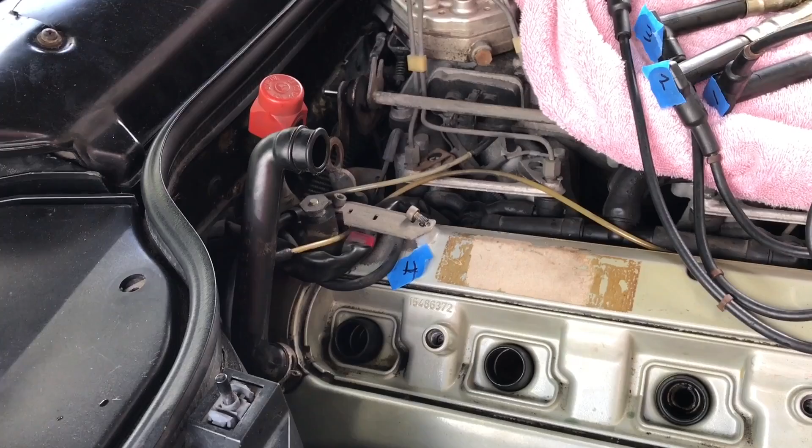Okay, this right here is a 5mm hex wrench, removing the engine wiring harness clip.

So unscrew these and it goes this direction, like this. Okay, so you gotta remember that. The trapezoid part points towards the outside of the car.

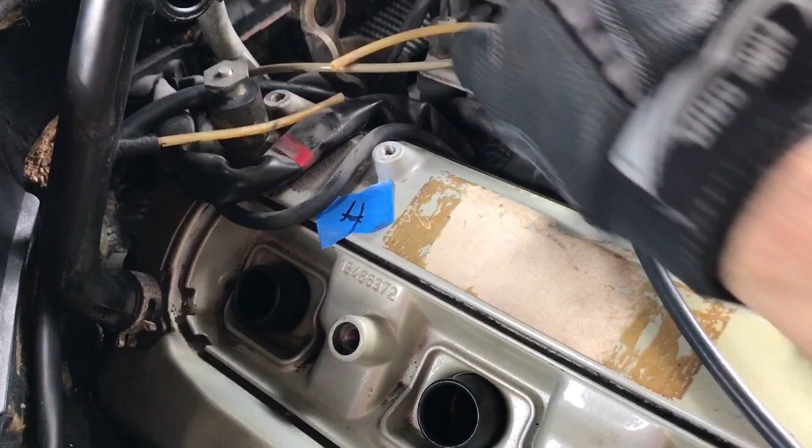Alright, well, this stupid little line just cracked, broke easily. So we're gonna have to fix that. Gotta pop this sucker off. So this sucker, I just got him right here. That's where he goes.

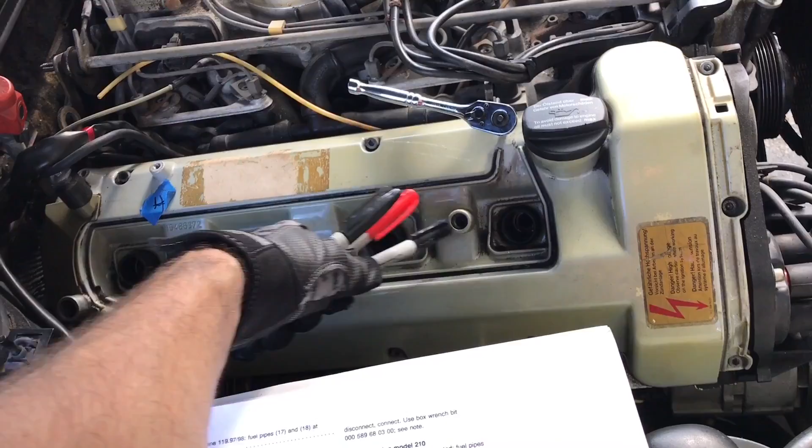Okay, so basically what I'm doing here is I'm gonna do the right side first, since when I compression tested the right side, this one was like 60-70-ish, and this one went up to like 150 just on the initial first turnover, while all the other ones are around 100-120. So this one's getting all the excess from here going to this one, so cylinder one's going to 2. My guess is that part of the gasket between these two cylinders is busted.

So we're going to try to change the gasket. Now to get to the gasket we got to take a bunch of stuff off here.

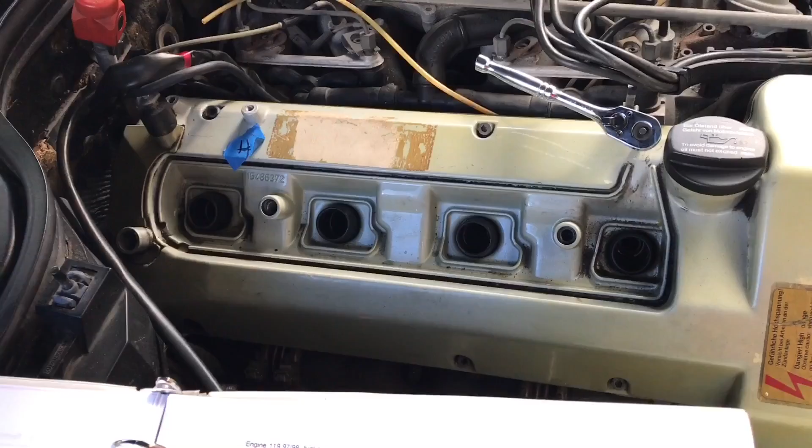Already took the air vent stuff off. Had to take off this, I think it's like a fuel air, crank line, whatever, escape hose. Took that hose off. Took out the spark plugs, took off the ignition cables.

Now we gotta take off the bolts around the cylinder head cover. So this whole thing's a cylinder head cover. And we took off the little plastic piece that was right here, just pop that sucker off.

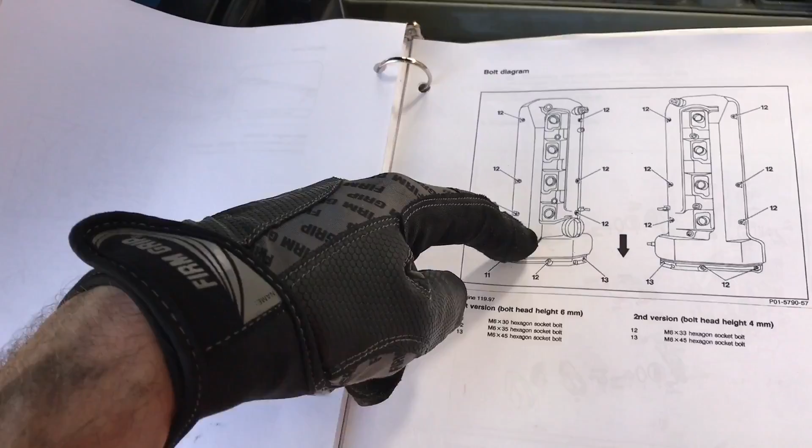So according to the manual here, the right side has 1, 2, 3, 4, 5, 6, 7, 8, 9 - nine of them. Alright, so we're gonna go around and take them all off, one by one. So there's 9 of those all the way around.

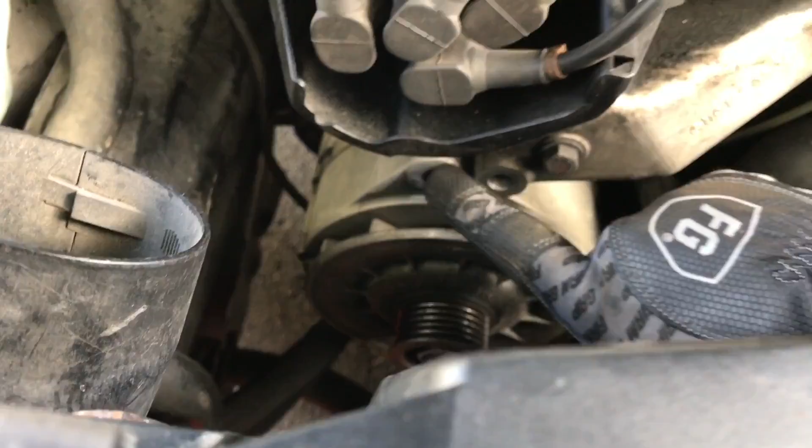Oh yeah, I forgot to mention, this right here is the alternator. So I had to take out this bolt. It goes through here to here, like here, let me show you. This sucker goes up like that. So I took out that bolt, and then there's another one right here. Can't really see it because it's dark, but it's right here.

Now the thing that's a pain in the butt is to get to that one, you have to take off the fan. And the fan, 8mm hex wrench that goes into the little fan attachment here. Put it in there, and you got to hold on to the pulley while you're turning it because it's connected, so that pops off.

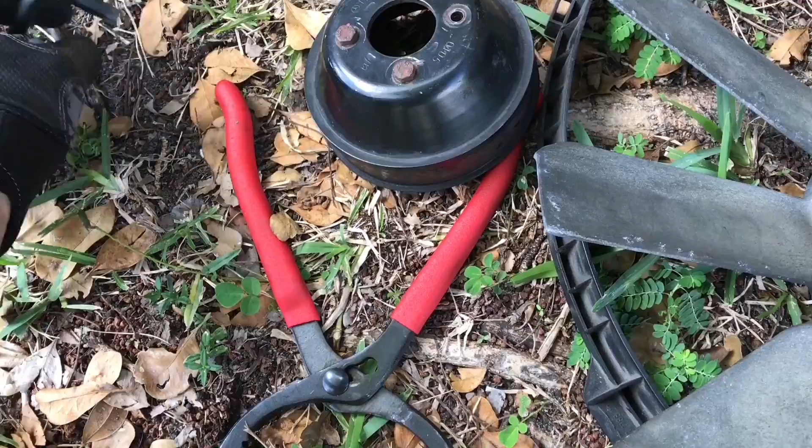Oh no, I don't want to lose the screw. And then these guys just pop right off. You just screw them off, and then you get the pulley part. So that's the pulley that goes to the fan. Actually, it goes like this, flips over onto there, but you got to get that fan off first.

Once you get the fan off, then you can unscrew the alternator bolts, because these guys got to be loose, I guess, in order to get to the cylinders. Alright, so we're gonna take those off.

OCD kicked in and didn't want to have bolts not going to the right spot, so numbering the bolts, so the same bolt goes into the same hole. 1, 2, 3, 4, 5, 6, 7, 8, 9. Alright, I'm gonna put the bolts in little baggies and then it should be okay.

So take it off. Alright, took all the bolts out. All these bolts are the same size. They're 35mm bolts, except for this one down here - that one's only 30 millimeters in length.

This guy up here is actually the longest one. It's 45 millimeters in length, and these are only 35 millimeters in length. So you got a 30 down here and a 45 and a 35. So there's 3 different sizes of bolts. That's why you don't want to get them mixed up. Basically they're all the same except for this top one and that one - long one, short one.

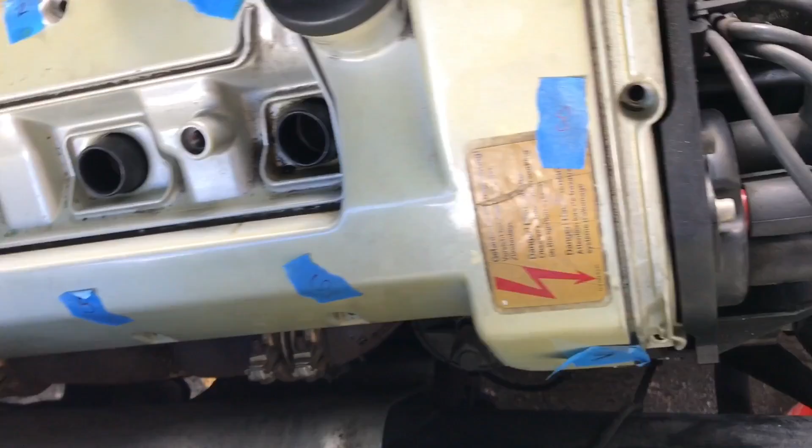Alright, now I just gotta get this thing off, but man, dude, I can't get the cylinder head cover off. See, there's a gasket right here. It goes around the whole thing, so I don't know if someone sealed it in or if it's just really, really tight fit. I think I'm gonna try wedging a screwdriver right here.

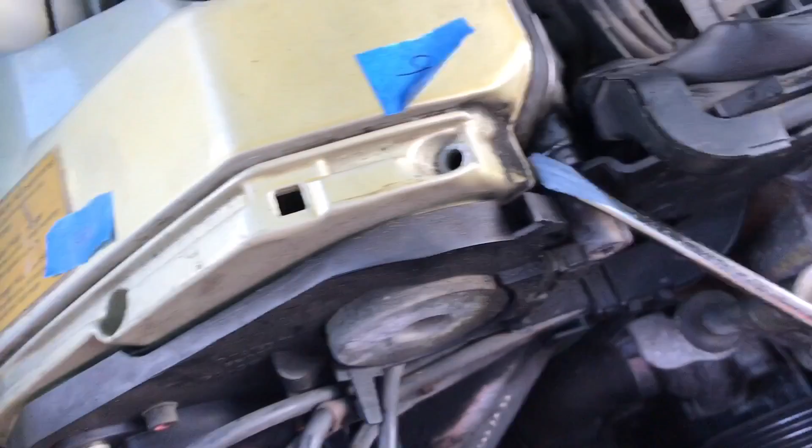Oh, this is going to take 2 hands, I think. Let me see if I can pull it. Oh, it's loose now. Okay. Cylinder head cover.

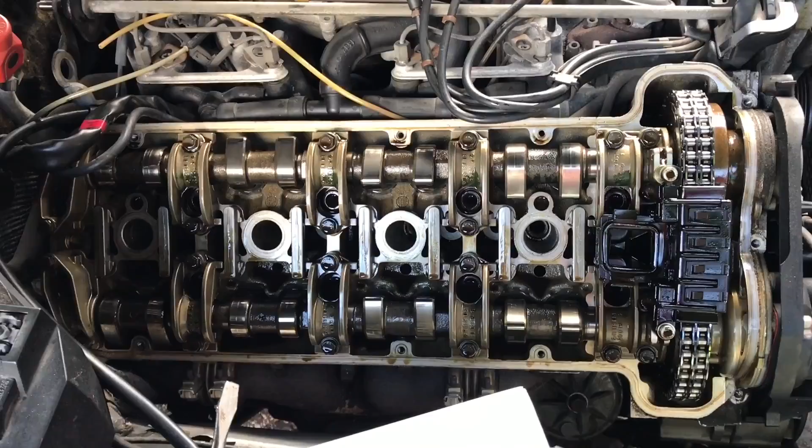Oh frick, I'm stuck on these freaking cables right here. Alright, need 2 hands for this. Alright, I got it off. There's the cover.

It's the inside of the cover, obviously. I guess it's not too bad. I was hoping there wasn't a ton of sludge, and it doesn't look like there's a ton of sludge. Pretty clean.

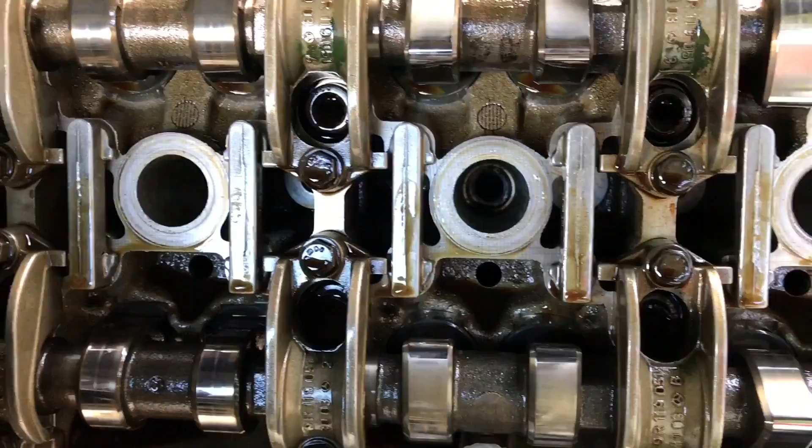There's the timing chain, camshafts. Those are the head bolts. Got new head bolts because I gotta put in the new head gasket. That's where spark plugs go down, in those holes - that hole, that hole, that hole, and what else? Oh, cool!

These are the - what are they? The camshaft oiler tubings. It looked like online most of these are plastic. I guess in my car they're metal. This is a 1991 R129 M119 engine. So I guess in 1991 they had metal ones, or maybe whoever the previous owner was switched to the metal camshaft oiler tubes. But the good thing about the metal ones is they don't break. I think I read online that the plastic ones, like the little cover things, pop off the ends or something like that. I don't know much about that.

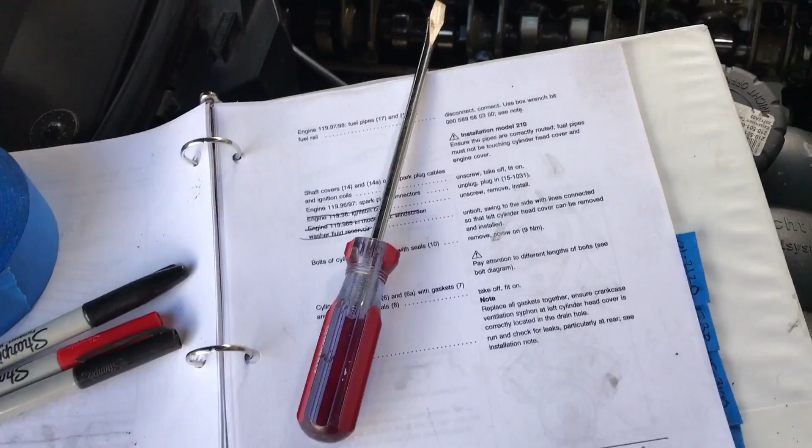Alright, well, proceed to the next step in the manual. Okay. Next step is to take the bracket off the actuator.

You got 1, 2, 3 - one right here which is a pain in the butt to get to - 4, and there's a bolt underneath this thing, underneath this. 5 is actually a bolt, not an Allen wrench. These are a number 6 Allen wrench: 1, 2, 3, 4, see it right there? And then the bolt is right there.

Alright, well I gave up on this bolt because it was impossible. I did not want to take this off because it's full of fluid. So I just took these 2 bolts out and that should be okay.

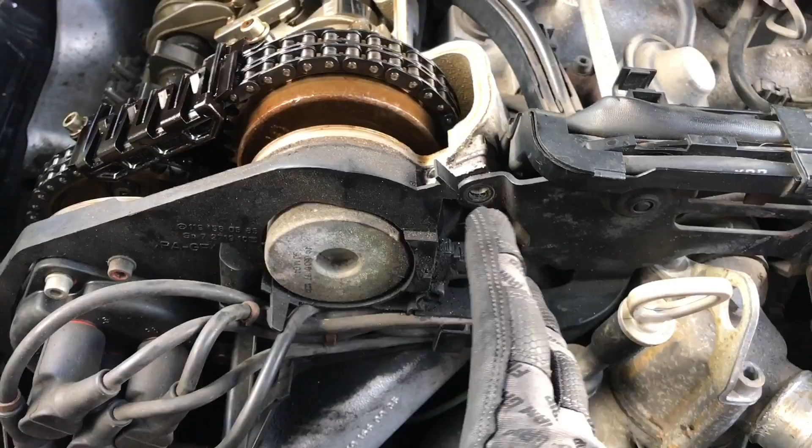Now I'm going to take off these guys, which are the distributor ignition cables or something like that. Can't exactly remember. I think it's the high voltage distributor, so I think it helps with the firing of the right cylinder at the right time. So I'm going to take those off.

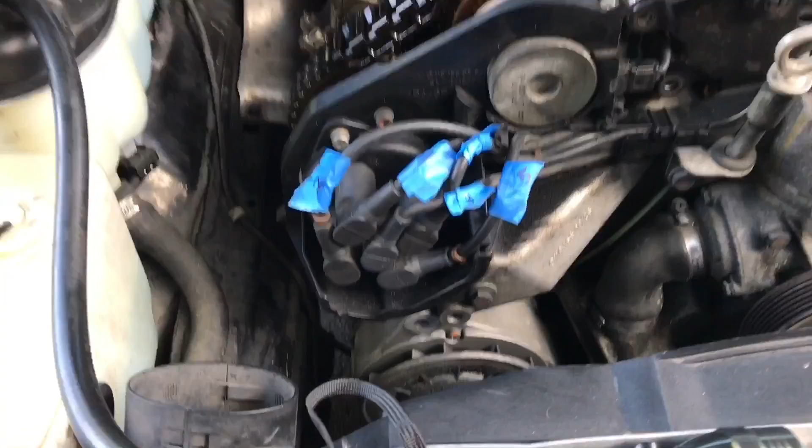Okay, so the distributors - I numbered them because I didn't want to get them mixed up. 1 here on top, and then it goes across, 2, 3, 4, and then 5 on the bottom. Alright, so I gotta take these off and then take this cover piece, this black piece right here, gotta pop that off. Then we'll be able to access - there's 2 camshafts right here, and the bracket things that hold the camshafts in, so I gotta take those off. But these I think have to go in a certain order, so I didn't want to mix them up, and so I just used tape: 1, 2, 3, 4, 5.

Okay, so after looking at the distributor a little more closely, I don't think I have to take these things off anymore. There's a bolt right here, there's another one under there, and there's one more right in here, right in there, that I just take off - those 3 - and then I can get this whole piece off. So I'm going to try that first.

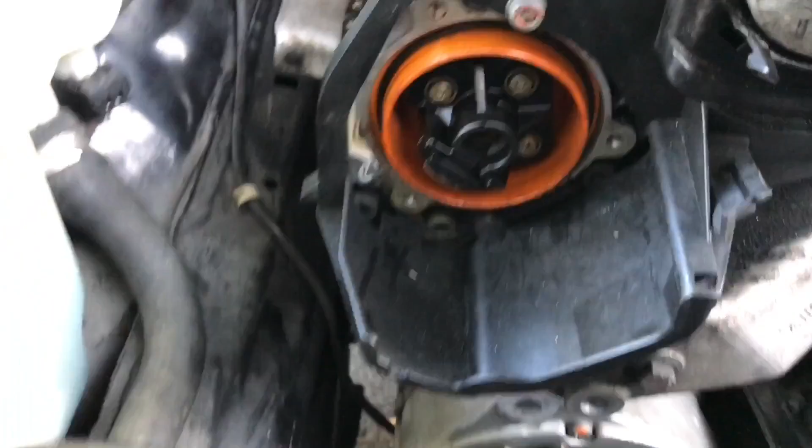Alright, see this sucker just pops off. I put tape over the bolts so I don't lose them. And then, there we go. So voila, this piece is up, separated I guess. Just let it kind of hang there.

And then for the cover - the cover's next. So got that cover off the distributor. Now it's this cover, 1A, covers, remove. Alright, looks like we have 1, 2, 3, 4, maybe 4 bolts in that thing. Let's do it.

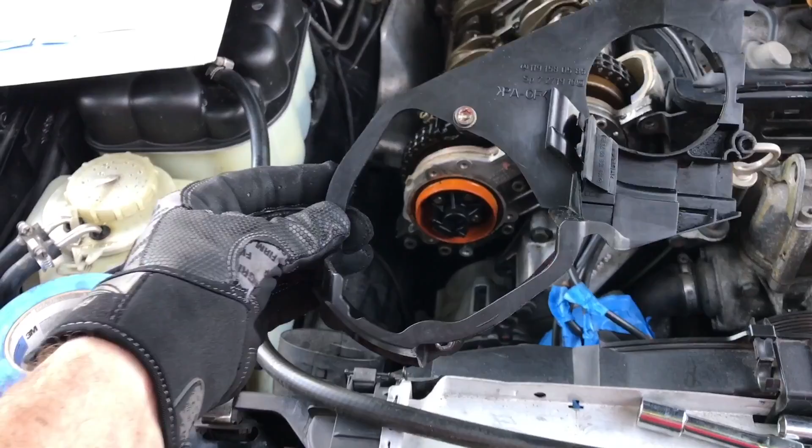Okay, got the cover off. Covers 3 bolts along the bottom, top, side - 5mm Allen wrench. So here's that. Now, gotta get this sucker off right here.

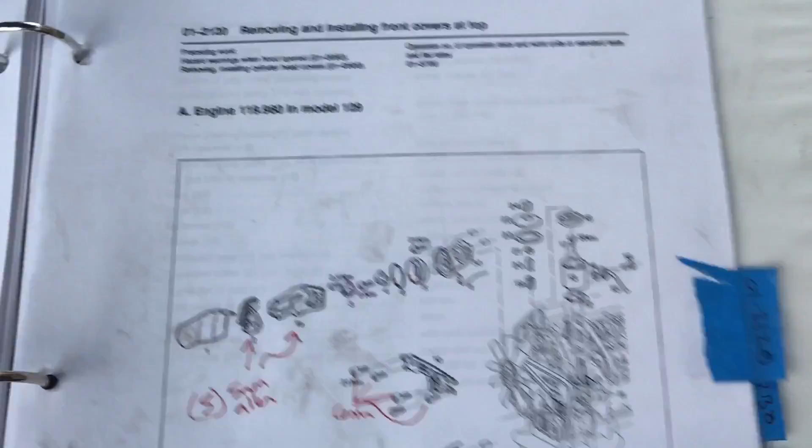That would be number 3 and 4, which are the distributor rotor and the follower. So we gotta get those off. 3 and 4. Right there.

Distributor cover, 3 bolts. This sucker came off, and it was a 3mm Allen wrench. Alright, we'll proceed to the next step. 5mm Allen wrench right here, and oh, don't want to lose the bolt. It just comes out like that.

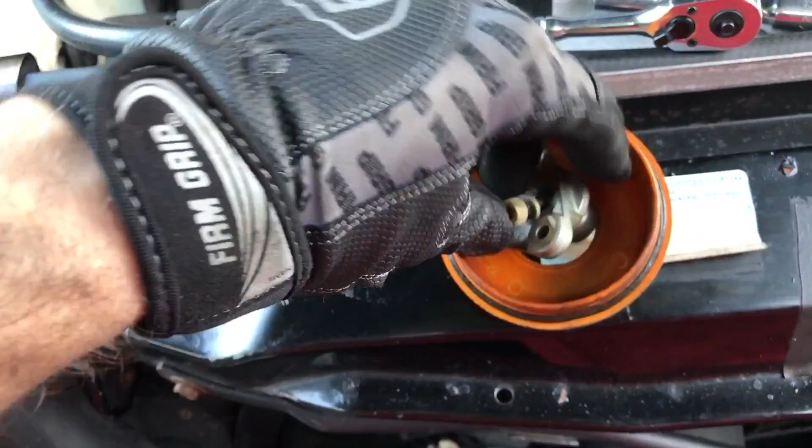There it is. So we're getting there. What goes with this probably gets put in the same Ziploc bag. Proceed, alright. Make sure you disconnect the - what's it called - this guy right here, and pop them off. That's your connector for your solenoid or your camshaft adjuster right here.

Then we got to take the front cover off. There's, from what I can tell, 1, 2, 3, 4, 5, 6 bolts. So we gotta pop off. Alright, here it is. The front cover was right here, came off, boom. See the bolts? 1, 2, 3, 4, 5, 6. Alright.

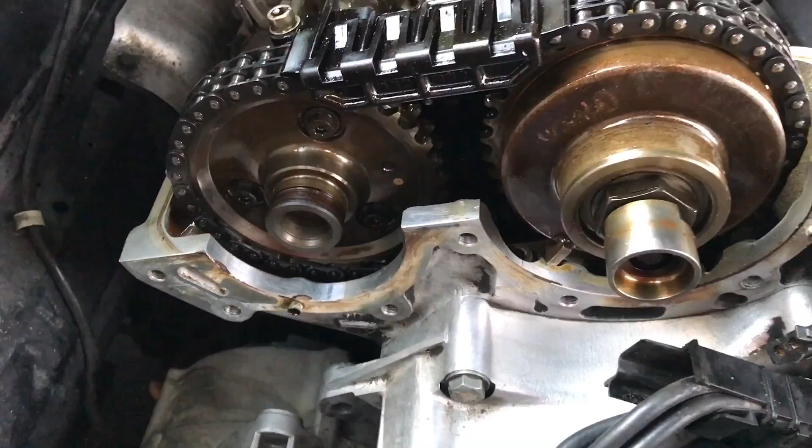That's the piece of the front cover. Okay. Now we start working on the whole timing system and stuff. And I'm starting to lose my light.

Now, I've only taken one of the cylinder head covers off, so I gotta take the other one off too.

Because the next step is making sure that the chain and the camshafts are timed correctly with the main crankshaft down here. There's a little marking on it, supposed to be at 45 degrees. Can't see it too well, it's kind of dark, but I gotta line that up to 45, and then in here there's little guide tubes right here and here, and that lines up with the camshaft, so that's how you know it's in line. So I gotta take off the other one so that all four of the camshafts are in line, because if they're off, then your engine's going to be screwed up.

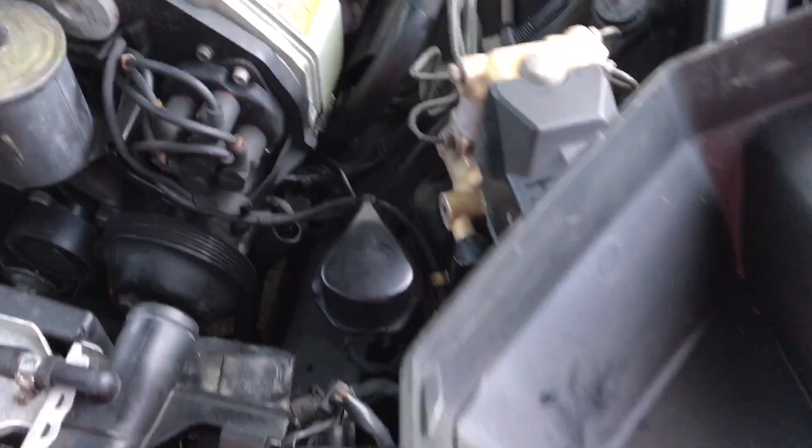Now we have access to the bolts. 1, 2, 3, 4, 5, 6. This one's going to be the hard one. And then this one down here, that may be hard too. 7, 8, 9.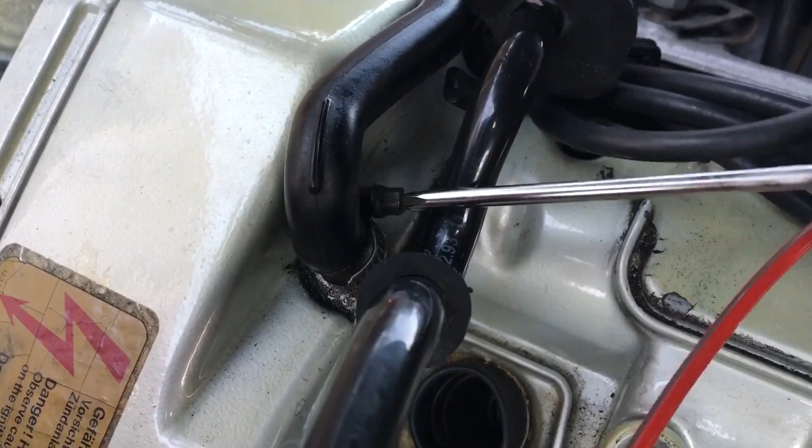So we got to figure out how to take this air crankcase tubing off. Crankcase ventilation line removal. Just put a screwdriver right here. Sorry, not used to my new phone camera. Loosen up that. Come on.

Geez, that thing's on there pretty dang good, which is super long. There we go. Okay, got it. Alright. Okay, fine. Sweet.

Now for the bolt. Alright, so I got all the bolts out of this. Can't take it out because I got to remove these two fuel lines right here. It's stuck underneath it, so I got to take those off. So fuel lines, I just loosened them up right here and just kind of angled it up because I couldn't get that second one off. But it gave me a lot of space underneath now, and got it off.

Now I got to make sure the timing is okay and mark the camshafts and the chain. That's the next step. Okay, so I got the timing thing kind of figured out. Marked the camshafts with the chain so I know where they go. I did all four of them.

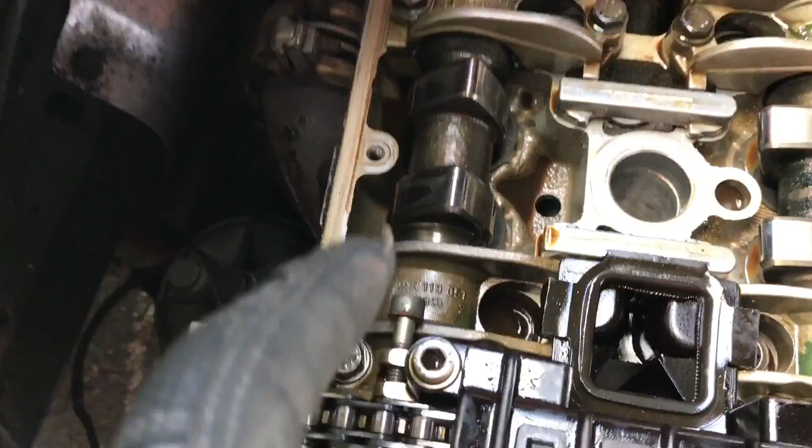The timing is a little off. I can't get the bolts, these bolts like this one right here, to go through the holes when it's turned at 45 degrees. Right now it's at like 44 because I got this one in, and then in the manual it says to get that one in so that when you loosen the chain tensioner, when you take the chain tensioner off, that this chain doesn't jump here on the exhaust cam. So that one's in the hole.

Now I got to do the chain tensioner. I got to take this piece off, and then it's underneath here. I got to unscrew it.

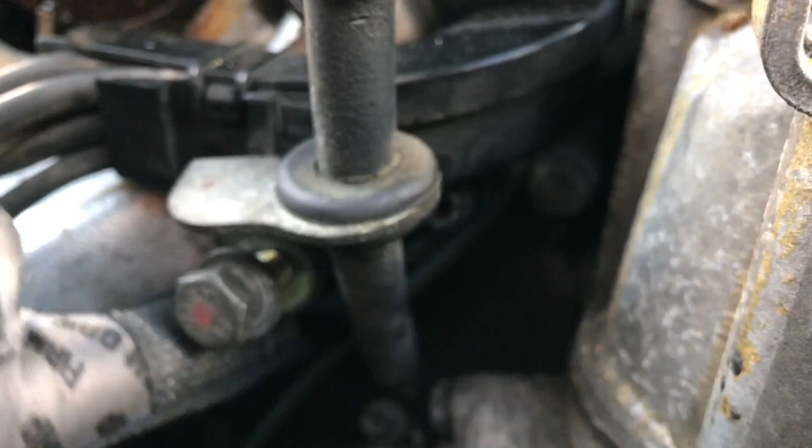Okay, so this piece, don't even know what it is, pain in the freaking butt to get off. Got this bolt loose and then taking out this one. There's another one that's right here. Got that one. And there's this freaking stupid Allen one right here. See it? Right there. This one. Freaking stripped that thing. Couldn't get it off.

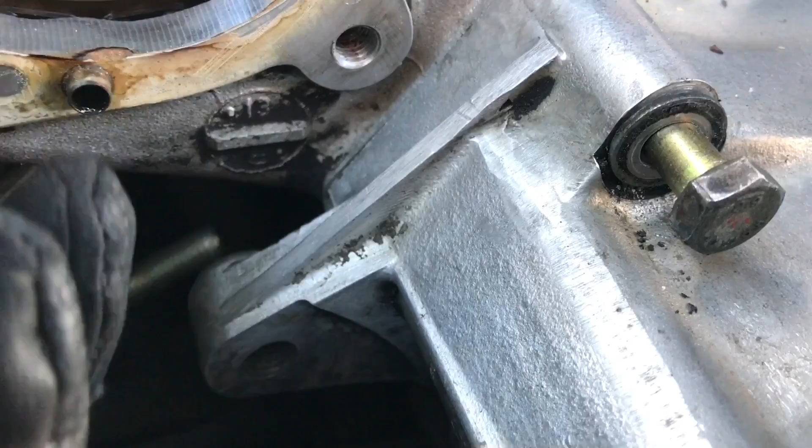So we're gonna try to just keep this thing on and just go to the chain tensioner under here. See if I can even get it down. You can even see anything, probably not. Anyways, I already took one of the bolts out from the chain tensioner guide, right here. It was like underneath, up in here. Super hard angle to see. Yeah, I can make it brighter. Yeah, I don't know. Let me grab the flashlight real quick.

Alright. Yes, so I took that bolt out. Now I gotta take that nut off, and that, I believe, is the chain tensioner. Alright, so I gotta still take that nut off, but I got the bolt out. 13mm.

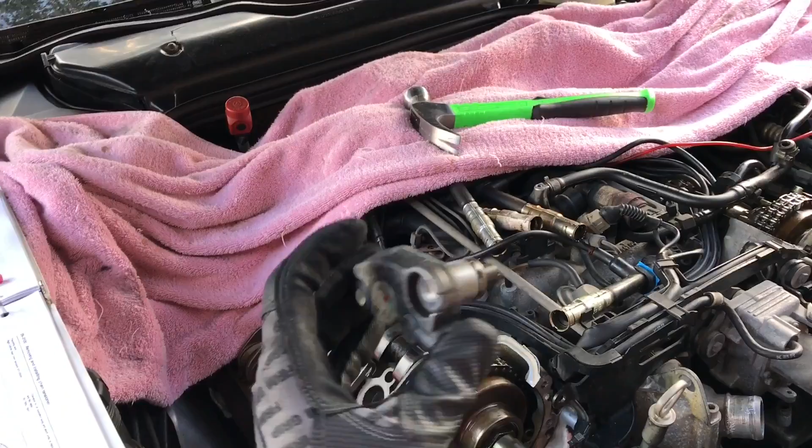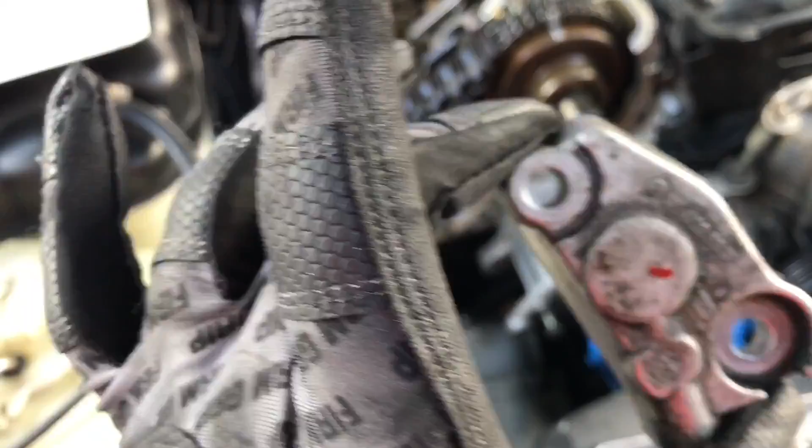Okay, this is the chain tensioner. I just pulled it out from under there, under here. There was a nut on this one, right there. A nut and then a bolt. Both of them were 13mm. There's the nut with the washer. There's the bolt. Okay. So that just came out of there, and then the chain, I saw the chain get loose, so sweet.

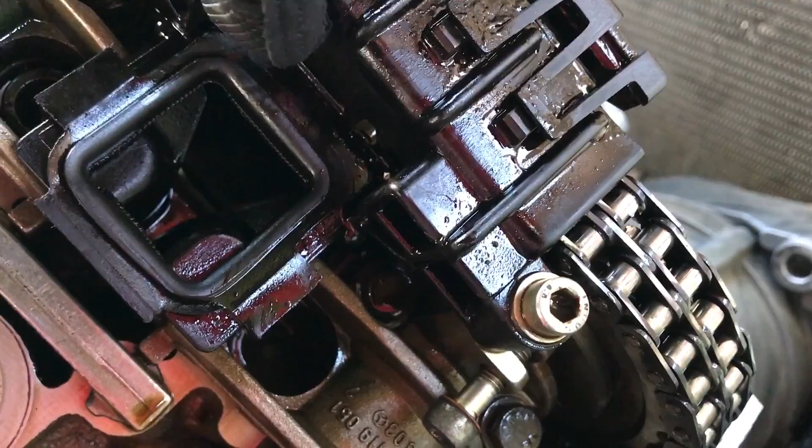Alright, now we gotta remove the guide rails. This right here is the guide rail. This piece I already popped off, but basically what you gotta do is pop it. There's two brackets underneath, this one and this one, and then there's these four on the top. I can squeeze it back in here. You gotta pop these four off the little lips, and then the two lower brackets you'll see them, they'll be right in here, you just push them out. I just pushed them with a screwdriver. Just be careful not to break them. So yeah, I popped the front cover. Now I got to unbolt the second part.

All right, now to take the rest off, you just unbolt this one and this bolt, 5mm Allen wrench, and then it just pops off. So I just unbolted those two bolts that slid out.

It's broken right here, mine is. See, that piece is busted off. It's supposed to be solid plastic, so I may have to replace this part. Yep, so it came out right there.

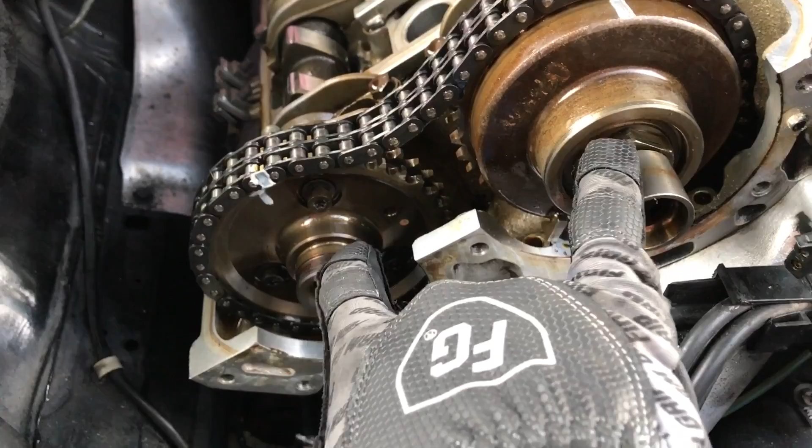Alright, so now we have to remove the camshaft sprockets. We're going to do the exhaust sprocket first. 3 bolts, 1, 2, 3. They are a Torx 30.

Alright, 5-star. No, 6-star, Torx 30. Let's take the sprocket off. Alright, so I just took off the exhaust camshaft sprocket, just lifted the chain right off of it.

So there's the sprocket, those are the bolts. And I have the marking so I know how it lines up.

Alright, next step here is to remove the camshaft adjuster. It's this thing, this whole thing. And it looks to be pretty complicated. There's a lot of little pieces and stuff that we got to be careful with. So,

Start out by putting this sucker on here, wrench on there, hold that, and then there's a bolt in there we got to take out. And we'll just go one step at a time. Alright.

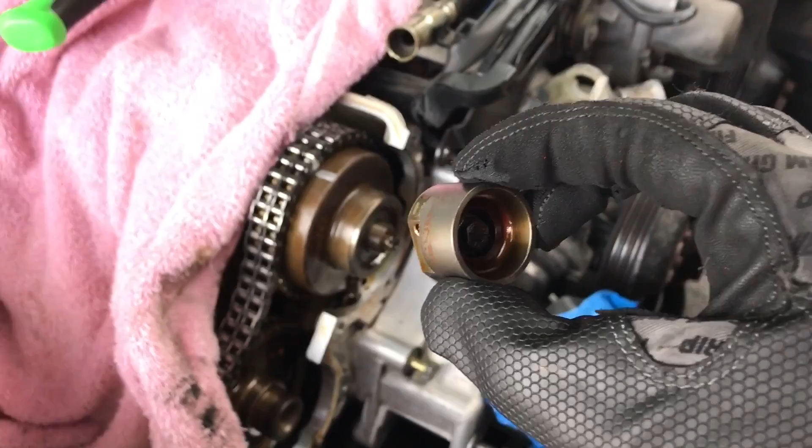I got this thing off. This is the holding armature, I guess, an 8mm bolt. Then there's a 29mm nut right here.

So I got that guy off. So now we're down to that.

Alright, well, it's starting to rain. Welcome to South Florida. So, gotta wait for it to stop before we continue.

So, there we go. Alright, so pop this cover came off of here and pulled the chain off, and now that it's kind of just, there's a spring in here. So that's coming out.

And then yeah, I just got to get the rest of this stuff off. Okay, now we're to the point where it gets really crappy.

That's removing the intake manifold. You can barely see it because there's so much stuff on top of it. So

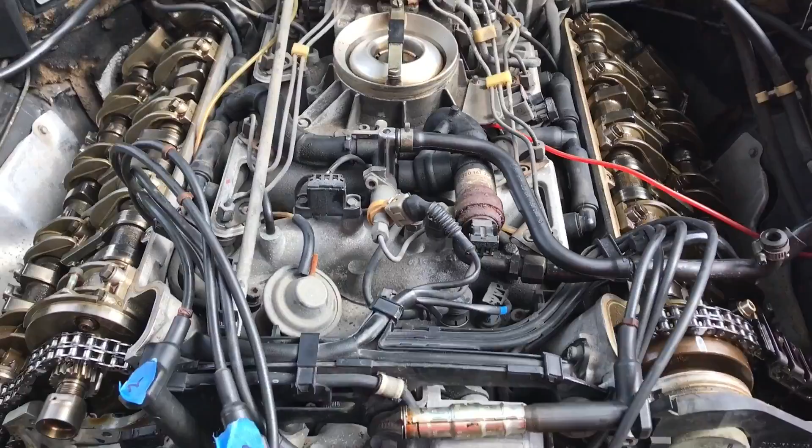Start by removing the air lines, and we gotta remember what goes what. This one off. It has 3 brown stripes on it.

2. That goes there. This one, which is a gray white one. God, it's hard to get this on video really good.

Right there. So boom, boom. Here's another one. Right here. Gotta take that one off. Don't want to break these lines.

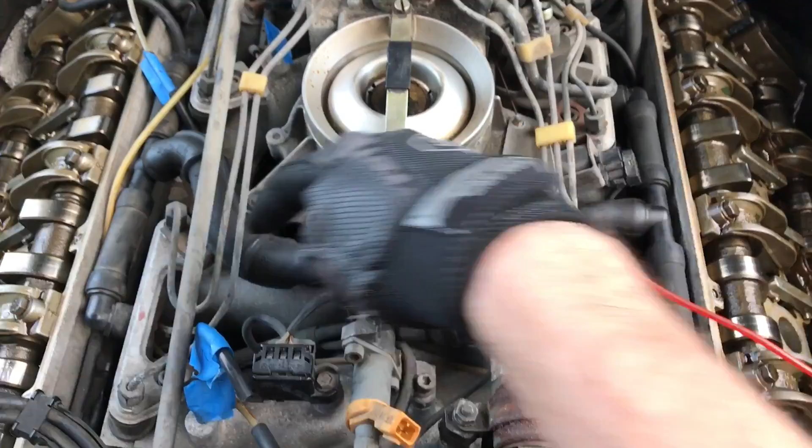Alright, gonna take this piece off right here. It's the tubing that goes to here, that tube, there's a little bracket piece right here that holds on these 2 tubes with this bolt.

So I unscrewed that bolt, unscrewed this bolt, it's really 1, 2, and this right here. So that's separated, so this all should come out in one piece. I just gotta pop these off, this off, that off.

Okay, so I unscrewed the bolts. I also had to unscrew this fuel line here on the front. This piece just comes out like that.

Don't forget about this line here. So whenever we're putting that back, that actually travels underneath, and I think it goes around like that and then back around over here. Alright.

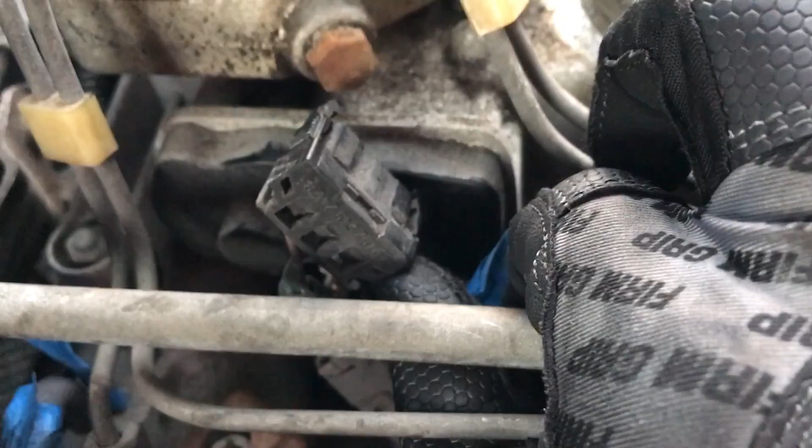These guys pop off maybe. Okay, so I separated this electrical clip from there. Looks like that. Goes right there. Then I unscrewed all of these.

Fuel injector lines, I'm going to try to take this whole thing off. Alright, I separated this electrical clip thing right here.

This one came off of this piece.

Alright, the project continues, Day 3. We have light again. So, getting ready to take off this piece.

So what I had to do here, just so I remember, start up here, detached this hose, and this one actually connects right there. I couldn't get this one off, but this one connects down here.

Alright, there's a piece down in here, little bolt that goes right there, and then this hose connects right there in the side.

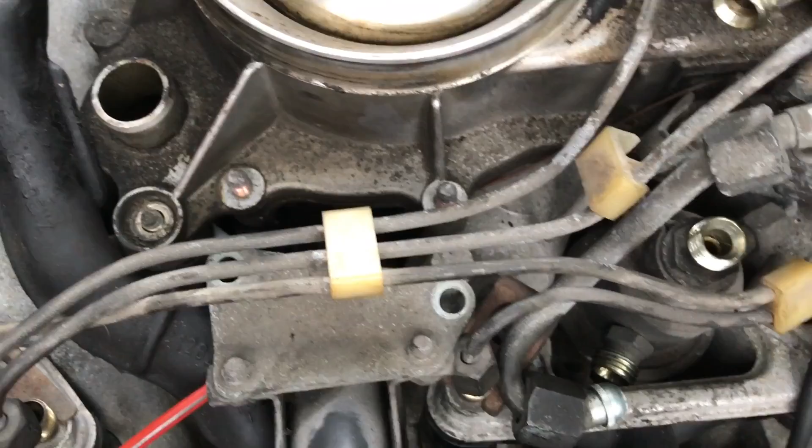What else? I took off all these. There's this piece, didn't have bolts on it, so it just kind of comes off. I'll have to deal with this later, but it does sit up on top of that.

This one was stuck on here, so I took it off. And I think that's it for this top piece. Alright, so now we got that off.

This piece is connected to an air hose on the bottom, a vacuum line or whatever. Tubing runs under here, comes up right here, over here. So it comes under here, over here, boom. That's the one that I broke. That one actually goes to the back of the cylinder head cover.

So that just pulled off. I can just kind of, well, that's just breaking as I pull it out.

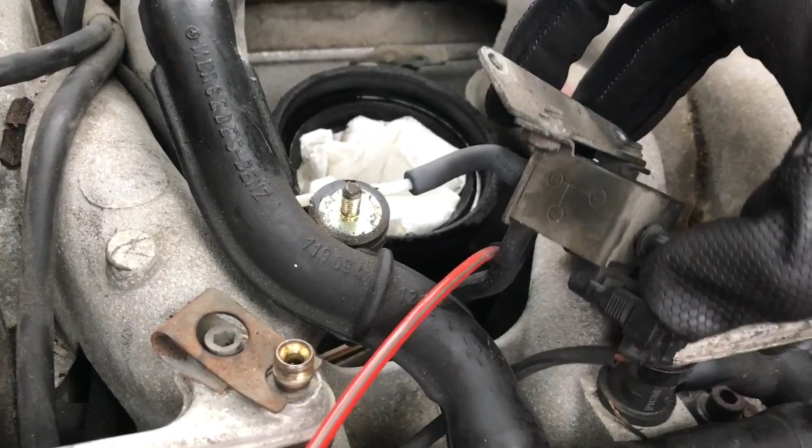Alright, next piece is this right here. We have a white line that goes to the back, and the bottom is this tubing. It's like brown. What color is it? Brown with a black stripe. Connected to the bottom.

And then there's an electrical clip here. Where does it run? It runs down here. This connection comes off of here. Then I'm going to dismount this.

Alright, this bolt with the washer went over this. That's like the ground, I guess. Taking that off. Next step here is loosen these, and this piece with those all come out, and then I already took it out right here. Then the black tubing will come off. Just remember the metal piece rests up on top of this lip.

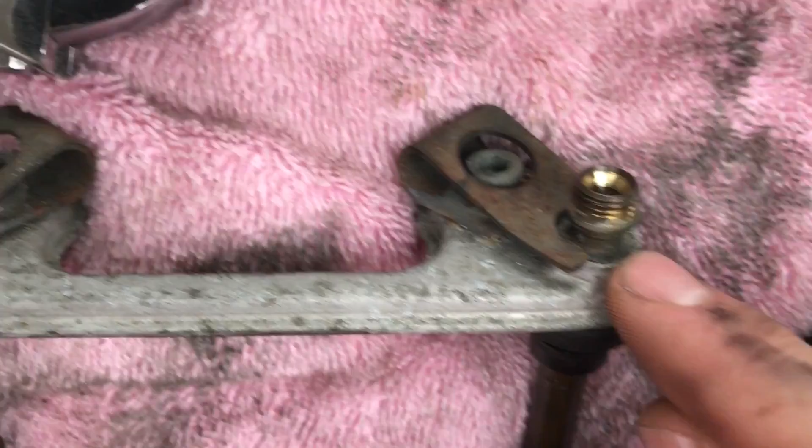5mm Allen, and these are kind of all loose pieces, so keep them together. So this just came out of the holes, just like that.

Alright, now we're taking off the ignition mounts off the head. So it's one bolt here, one bolt right there. I took that one off already. And then this bolt has a spring that actually goes from here to this hole. So this little hole to this little hole is where this spring goes. I popped that off. And then there's one bolt right there. That should do it.

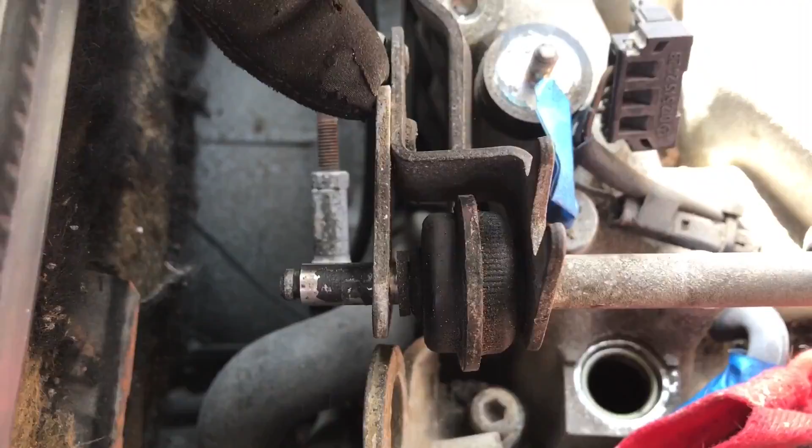Alright, now we gotta take off this throttle arm. So I just took this little bolt out from here on this side, and then this piece slips off like this. And it's just gonna end up hanging there. And then this should slide off. There's a washer.

So I gotta detach it from that side first. Come on. There's not much give in this sucker.

Two hands. Alright, so in order to take this off, it's attached to this, which I think is the starter. Could be wrong. Anyways, there's a bolt or a nut right here in my fingers that goes right over there, and there's a washer. It's right there. Anyways, I'm gonna pop this off.

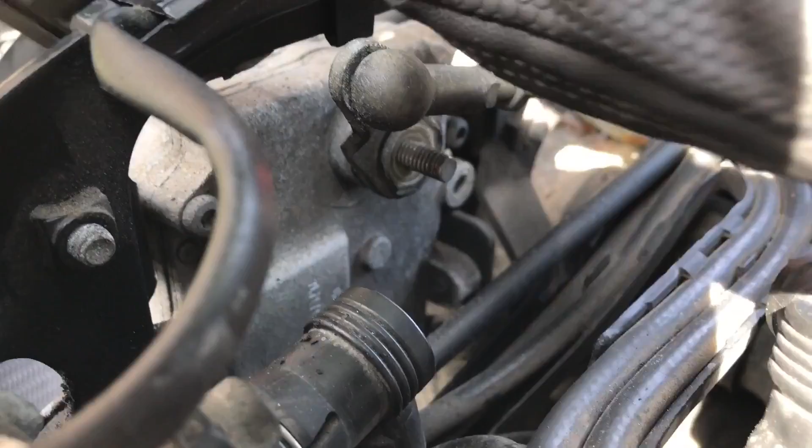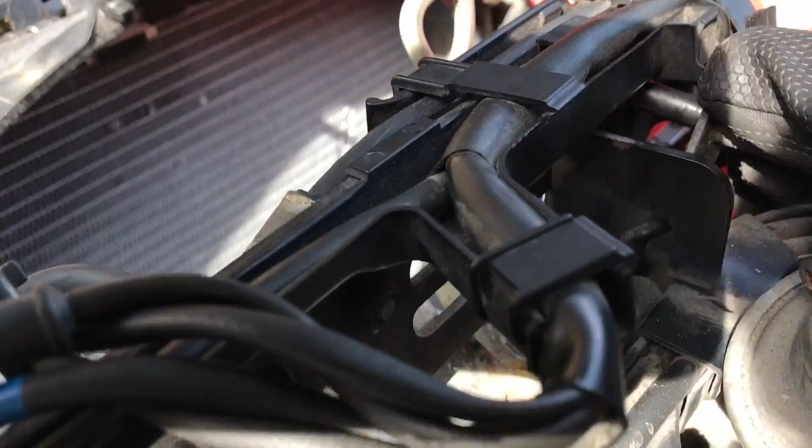This is gonna slide off, and then when this slides off, everything should slide out. Okay, so boom, that's off. This pops out of the hole right there. And let me see if I can kind of pop this over. Trying to give me some working room here. Just up and over this.

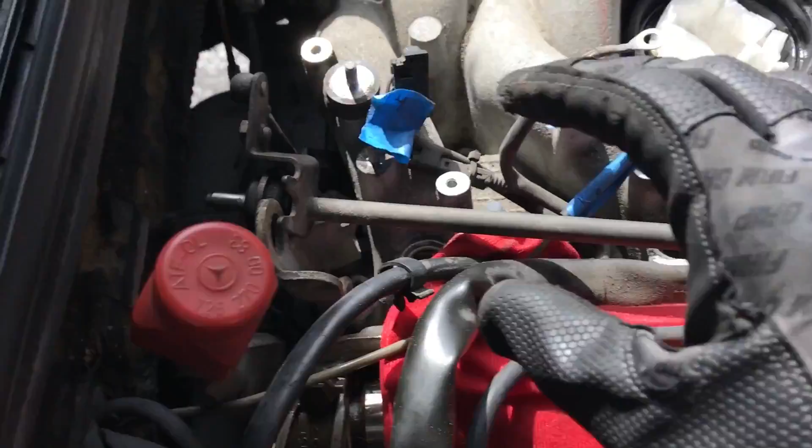Pull it out of there. And pull that out of there. Now I can pull this off. Just to make sure everything's okay here. Got this all spun around funky.

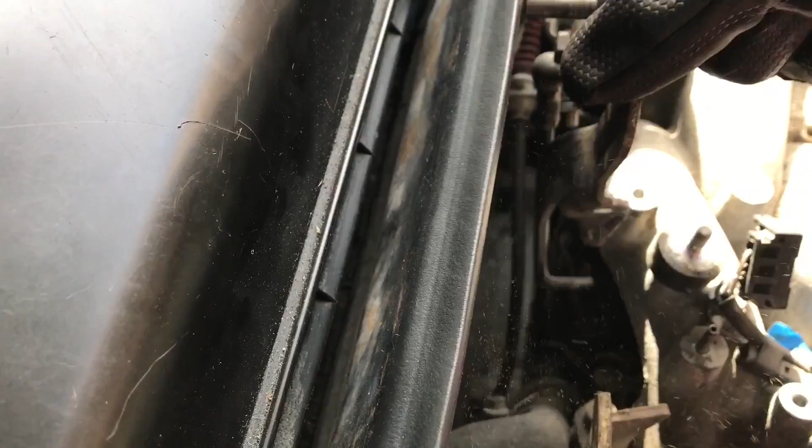I'm going to show how it goes normally. Normally it looks like this. Okay, I just got to remember this because I'll totally forget. So this is what it looks like normally.

So popping that off, pulling it out of here. Get that piece to come back down again. There we go. I can just slide and pop. Oh, shoot. That piece just dropped. Have to go fishing for that.

Anyways, here's the whole bar. Alright, let me go grab that.

Right now I'm trying to loosen up all the screws or bolts that are holding in the intake. So back here, there's these two that hold in a metal bracket, this metal bracket right here. And there's a second little metal bracket that's underneath that bolt. So there's two metal brackets, and there was a little brace thing that held this cable on right here, but it looks like it snapped off. So taking this bracket off.

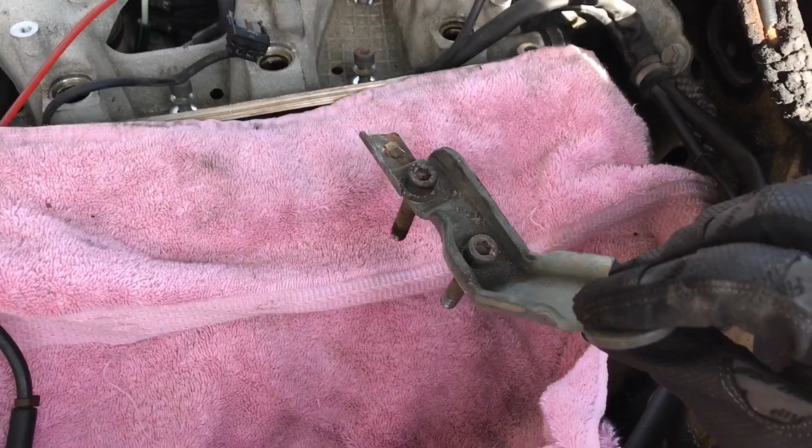Alright, so this is the bracket that was right here. Let me show you. Right there, on those 2 bolts, 1, 2. So that bracket was right there. That's where it goes. Whew.

Alright, same thing on this side. There's a bracket, 2 bolts. Focus, focus. There we go. 2 bolts, 1, 2. I'm gonna take that out.

Okay, one last thing I forgot here is this red line. You see where it goes? Way down in there. Yeah, I'm gonna pop that one off now. If I can get it. There you go. Maybe not.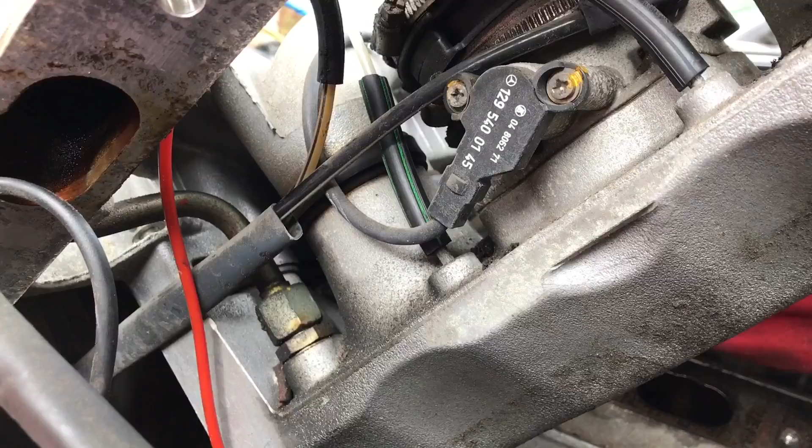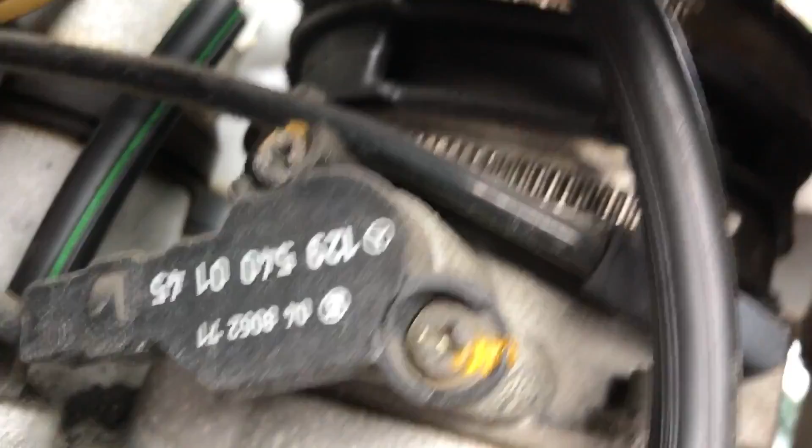Okay, so I almost got it out, but then I got hung up on something. See that cable? It's attached onto this side. The black air hose is attached right there. Okay, and then I gotta take off that electrical piece. So basically, I gotta take off this and that.

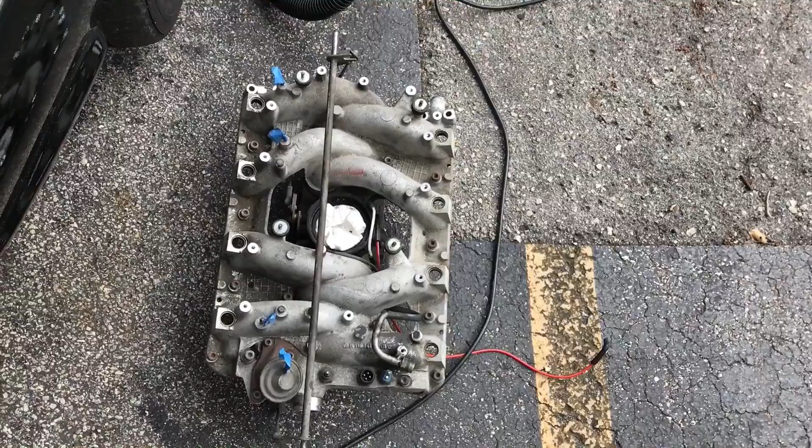Alright, there it is. Got the whole intake manifold taken out. There's the gasket. Got replacements for both sides. Voila, there's the intake manifold. Holy crap, that took like a whole day just to take that thing out.

So, sweet, alright, now that we have the intake off, there's a bolt that's right here on the back of the dipstick that's holding it into the cylinder head. And this is the bolt, 5mm. It's a pain to get to because the firewall's in the way, but I managed to get it out.

After that, the next step is to loosen up all the exhaust bolts. So I've gone ahead and I've loosened most of them, I still got a couple left. Alright, so I was able to get this bolt out, and now I'm going to take this piece off here. Three bolts. The one that was stuck, I think, came out of here. But yeah, so I got that off.

Woo-hoo, now for the cylinder head. Well, I still have to get the exhaust manifold off. I just took this piece off of right here because I need to take the chain off completely. Also, the 10 cylinder head bolts have all been loosened up, as well as the bolts for the exhaust manifold. Those were very hard to get undone, especially these down here because of everything in the way.

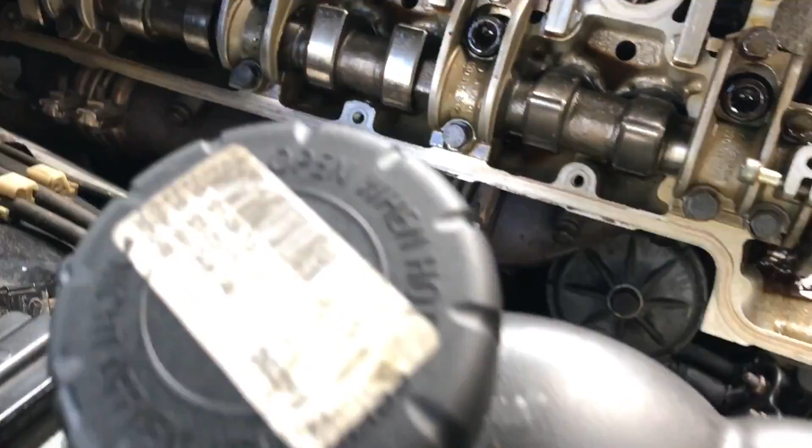Alright, here's a really long extension. I had to buy some extensions. Down here, oh, you can't see it, let me get the light for you. See that? See that right there? That, yeah, right there. That is a bolt, and there's one on the other side, and you're able to get underneath the engine, and with an extension this long, I was able to loosen up both of those, and that actually separates the whole exhaust manifold from the main exhaust pipe.

So that way when I pull out the cylinder head, this exhaust is going to come with it. I'll take this off once I get this whole chunk out of here. I'm going to take all these off, then replace the gasket, clean it up, and put those back on.

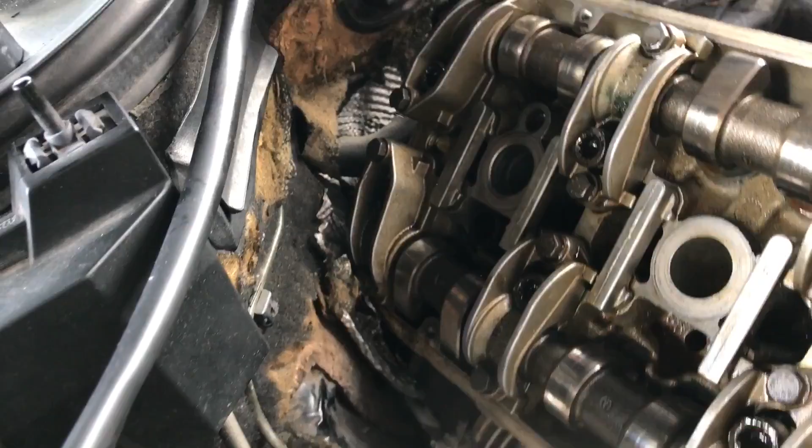Right now I'm at a stopping point because my bit is too long. This bit works on every single one of these except the one in the corner because I hit the firewall, I can't get it in there. Firewall's in the way, so I gotta order a shorter one, about this long. Then I'll be able to do it.

But this is loose, watch. I can basically lift it pretty much. See it separating there? So it's loose. All I need is to get that last head bolt out, and this thing is coming out. So that's where we're at.

Day number 5, stopping point because of this. I gotta order this online and it'll come in the mail.

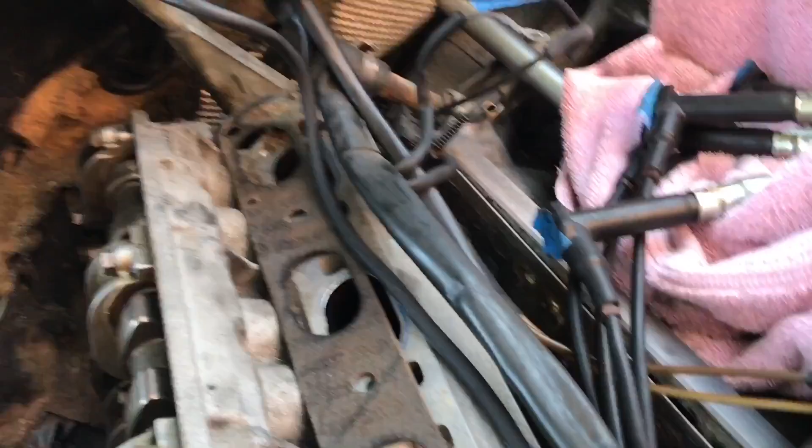Okay, so finally got the cylinder bolts out. Got the new socket in the mail. Almost have this cylinder head off, so you can see it separated there. That's the old gasket still there.

The chain. All I'm trying to do now is deal with this electrical cable. See it right there in the middle of the screen? Focus on it, that cable right there, it's attached to the cylinder head. So I'm trying to get it undone with a 5mm hex wrench. Oh gosh, it's really hard.

Okay, cylinder head is off. That's the block right there, 4 cylinders on one side. There it is. There's the underneath, I gotta clean this all up.

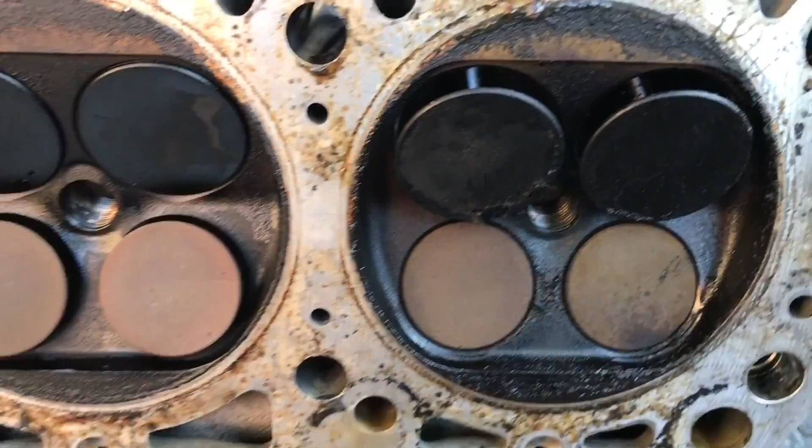I think the problem was the cylinder two. You look and see, these are lighter. These 2 valves are lighter, and those are really dark, and all the other 4 are lighter. I think the issue is with that second one.

Anyways, got that sucker off. My back feels like it's gonna break in half. This thing, you have to slide around it, pull the chain out and slide around it. It's a pain in the butt. Don't forget this is actually screwed onto the bottom of it, I didn't even know that. So I'm pulling this thing out and it's not moving, that's the exhaust pipe.

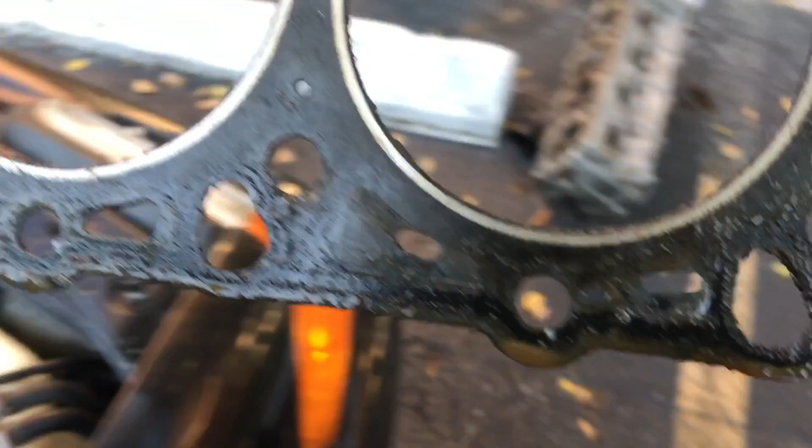Anyways, let's see here. Take a look at this thing. See, that's where the issue was. There and there, it looks like, and there. So if you look at number 2, right here, these 2 holes are really messed up. My guess is that's maybe why coolant's going into my exhaust, because of these 2 holes.

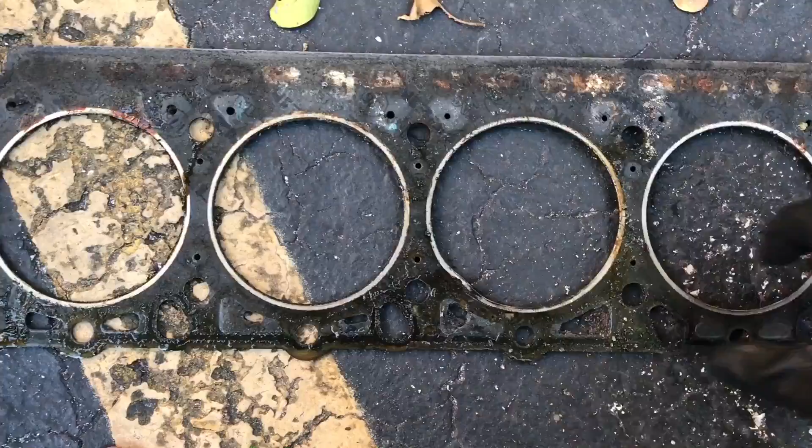I think I may have bent it just trying to get it out, but no big deal. Okay, so I was taking a closer look at this, and this bend right here, I don't think I actually bent that. These are the 2 coolant chambers that run through the cylinder head and the block, that go to the block. If you flip this over, check this out. Look at that, it's like burnt, and it got bent, so that's where it was leaking.

Well, that's good it didn't blow in between, because that's when it gets really bad, but this is nothing too crazy. I'm just praying the cylinder head isn't warped, because if it is, then we gotta resurface it. So that's where my coolant was leaking into my engine, was right here.

Alright, so this is the update. Cleaned off the cylinder head and the block, vacuumed it, aired out the holes, the whole bit. Made sure the surfaces were nice and clean like this, and on the other side, sorry I didn't get a video of it. I did not go and get it resurfaced, so I'm really praying I didn't make a bad mistake with that one.

I guess if I do, then it's no big deal because I know how to rip the car apart now. So now I'm basically putting it back together. I've already seated it, already screwed in the 2 bolts that hook the exhaust manifold to the exhaust pipe. The exhaust manifold's already attached with the new gasket. New cylinder head gasket, kept the old washers, it's not new cylinder head bolts. So 2, 4, 6, 8, and then 10, 2 back there.